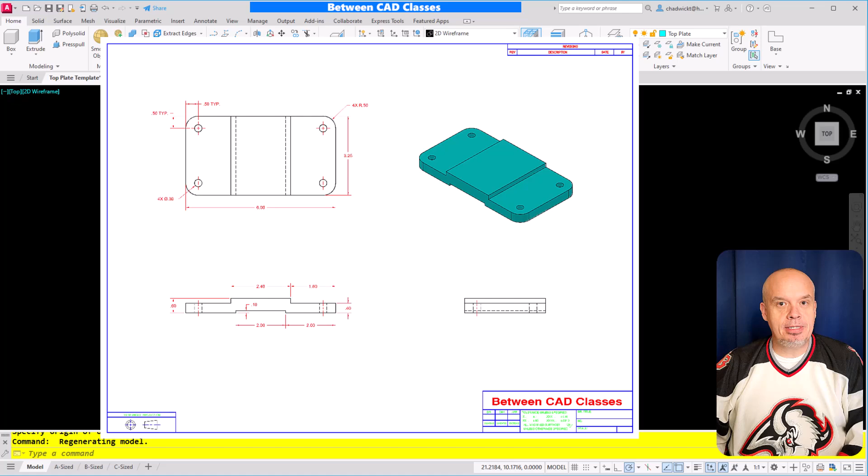The first part that we're going to create is going to be this top plate. I could approach this part a couple of different ways. I could sketch it from the top and extrude up and then add some features and cut, but I think the most efficient way is going to be to start from this front view and create this sketch and then extrude it back the depth of 3 1/4. Then, once I've done that, I'm going to add the rounds to each corner, the fillets, and then I'm going to add the 4 holes. So that's the path that I'm going to take for this particular part.

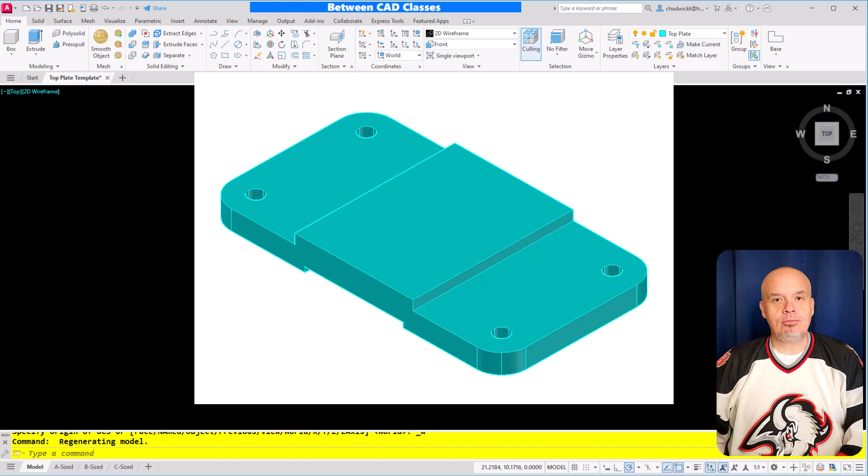Let's jump right into it. As you can see, I'm already in my top plate template, and as part of that, I've got my top plate layer current. You'll also notice that I've got my 3D modeling workspace set, so if you don't have that, you can click your workspace drop down and go to your 3D modeling.

As I mentioned a moment ago, I want to start by sketching the front shape. Right now my view cube tells me that I'm looking down from the top, so I actually want to change my view orientation to the front. There's a couple of different ways that you can do this. If you use the view cube, I'm going to go ahead and select the home button on my view cube to go to 3D. And I'm even going to turn on my grid so you can see the plane that I'm sketching on.

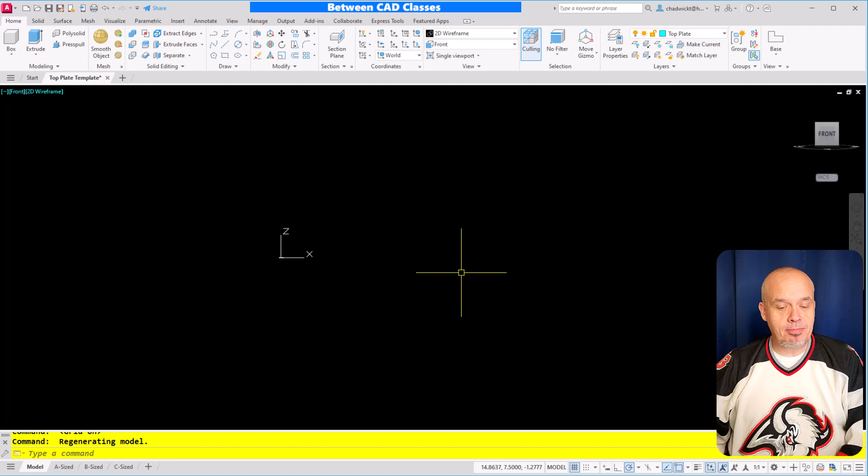If I select the front, you can see that I am not actually sketching parallel to my plane. In fact, if I try to sketch, I'm only going to be able to draw horizontal lines. That's because I changed my view, but I didn't change my user coordinate system. So I'm going to go back to home here. And then instead of using the view cube, I am going to use my view drop down right here, and I'm going to select front. Now it reorients my view, and I'm sketching on the XY plane.

Don't be alarmed by the fact that this changed to top. Basically, you're always sketching on the top, it's just we redefine where the top is. So as I mentioned, I'm going to start with that front view.

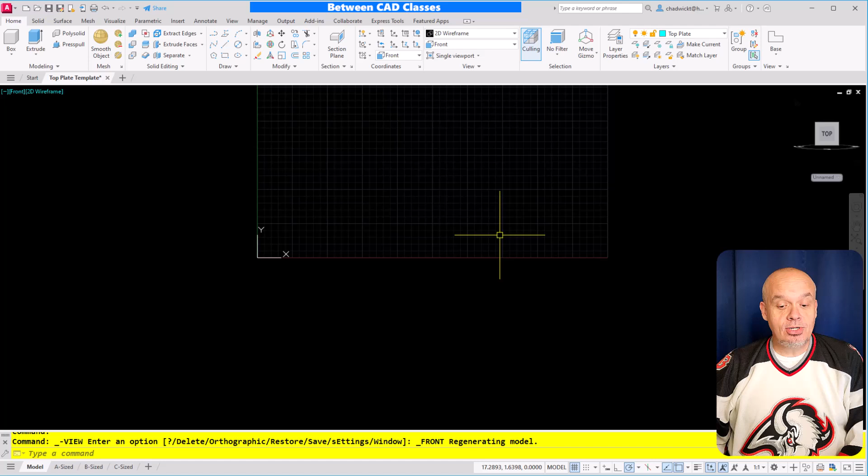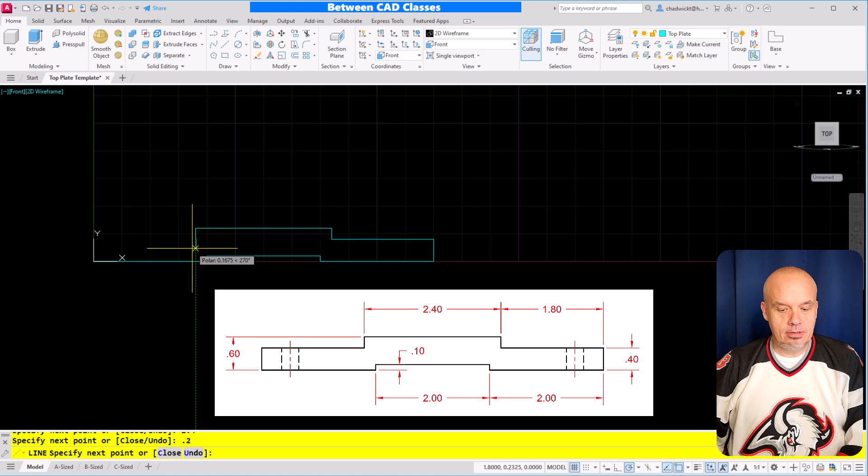I'm going to start with a line command, and then I am going to start at 0, 0 for my first point. Doing a little math, we can see that we're going to come straight to the right 2 inches to start. Then I'm going to go up 1/10 of an inch, so 0.1, back to the right 2, back down 0.1, back to the right 2, and then up from there 0.4, back to the left 1.8. Doing a little bit of math here, I'm going to go up 0.2, back to the left 2.4, back down 0.2 again, back to the left 1.8, and then you can either click on your original point, or you could type in 0, 0 and hit enter, or my personal favorite, I'm going to select close at my command line.

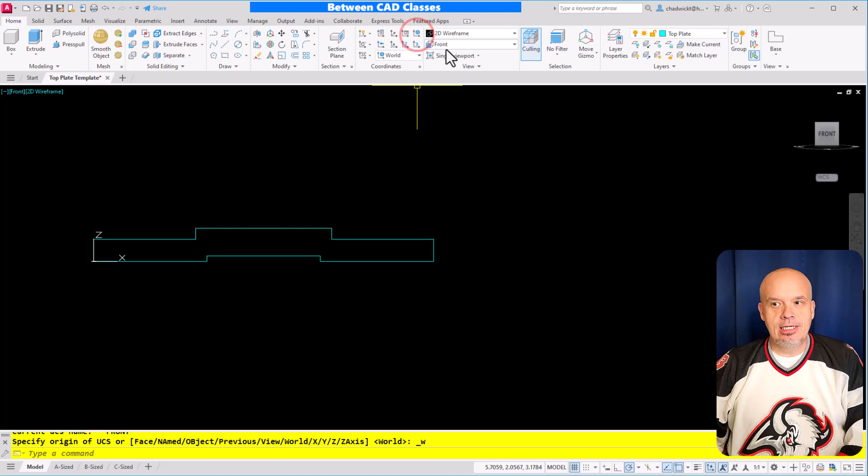Next, I'm going to return to my world coordinate system. I'm going to use this button right here that has the planet Earth on it. This sets me back to my original UCS. I'm going to click the home button, and now you can see that I'm back to having my horizontal XY plane here. Next, I want to extrude this, but right now I've done this as separate lines, so if I extrude it, it's going to create surfaces.

I'm going to join these together. Personally, I like to type J and enter, but you can also select the Modify drop down and select your join command right here. I'm just going to window around everything and press enter.

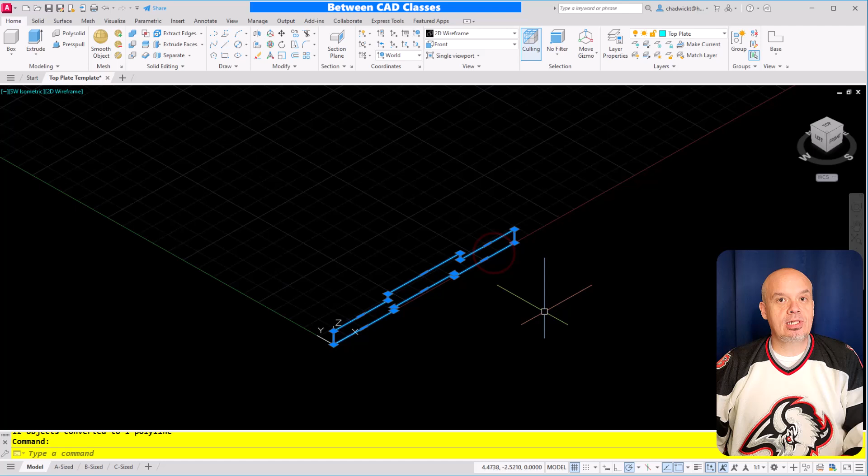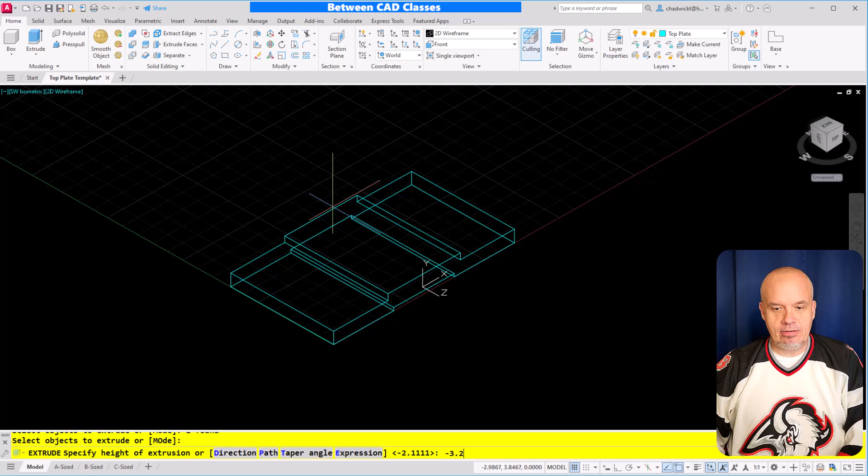Confirm that it's one selectable object now. Next, I'm going to extrude this. I'll select my extrude command and select my shape, then press enter. I can see that the Z positive direction is going out towards the front. I want it to go back, so I'm going to put in a negative value. So the depth is 3.25. I'm going to type in negative 3.25 and press enter. And now I've got my main shape here.

I'm going to use the text here to change this view to shaded with edges so that I can see the solid part. This is where you can confirm that you made a solid part. If you see grid lines all over the shape, then you know that you created surfaces instead.

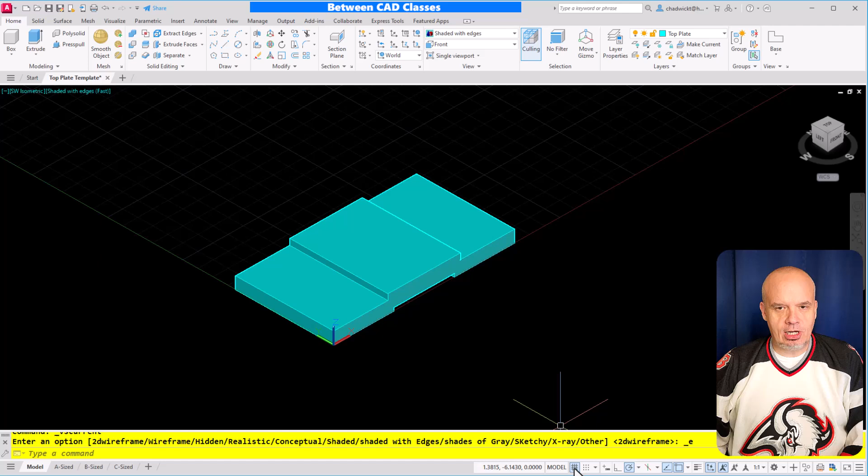Speaking of grid lines, I'm going to turn my grid lines off for now to clean up my screen a little bit. The next thing that I want to do is to fillet all 4 corners. I'm going to do them one at a time, that way, if I make a mistake, I don't have to start completely over on all of them.

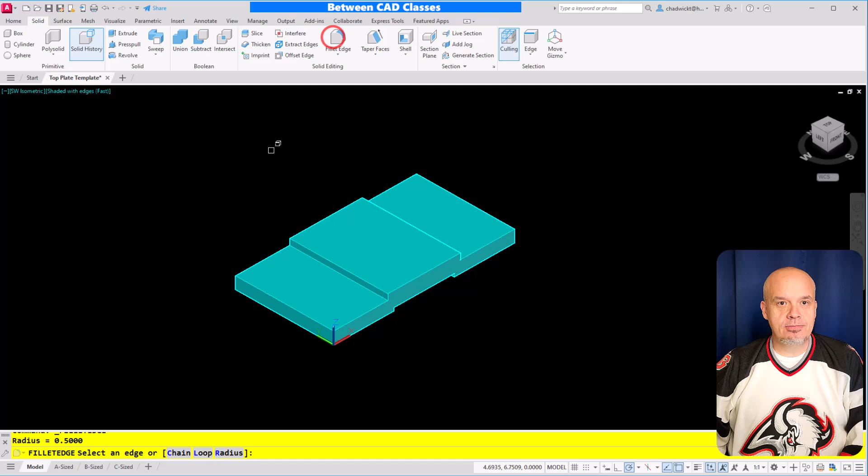For this, I'm not going to use the normal fillet command. I'm going to go to the Solid tab, and here I'm going to select Fillet Edge. As with the normal fillet command, I'm going to come down to my command line and select radius, then type in my value of 0.5 and press enter.

Then I am going to select the first edge that I want to round. I'll see a preview of it, and basically you have to hit enter twice: one time to preview it more in depth, and then one more time to accept it. So I'm going to tap the spacebar multiple times when I do this, to repeat the last command.

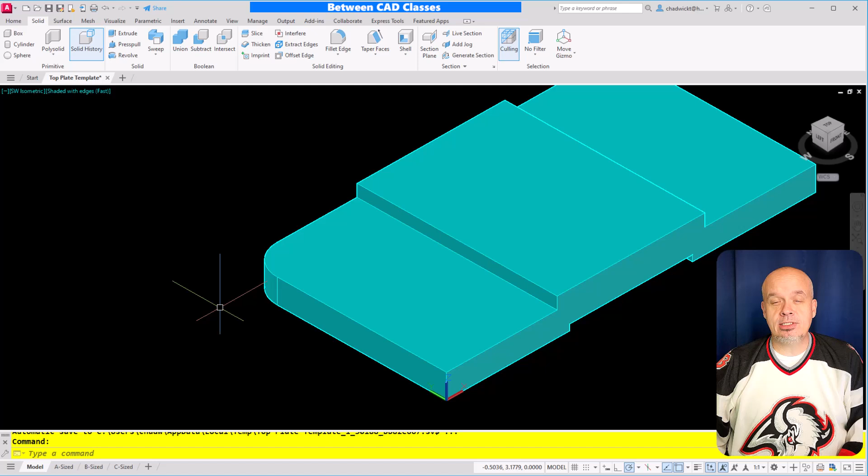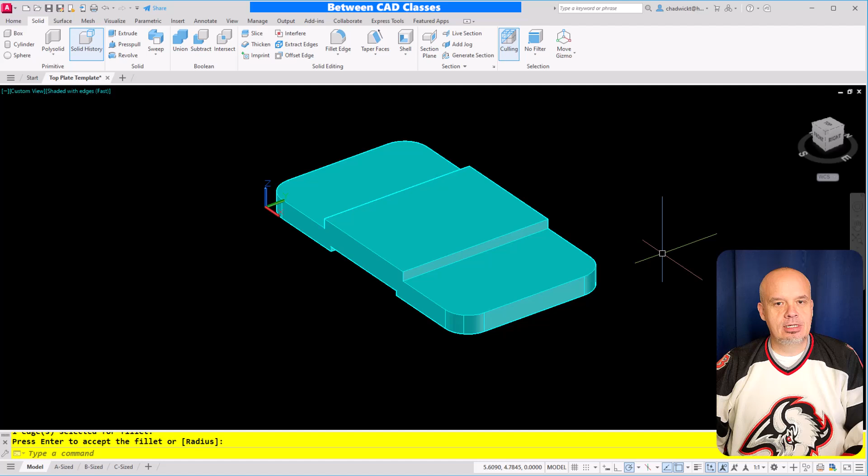I'm going to select the next edge, then tap it twice to accept it. Same thing: tap the spacebar to repeat the last command, pick my edge, press enter to preview it, and enter one more time to accept it. Then I'll revolve around here, and one more time, spacebar, select the edge, then spacebar twice. Now I've got my half inch radius fillets on each corner.

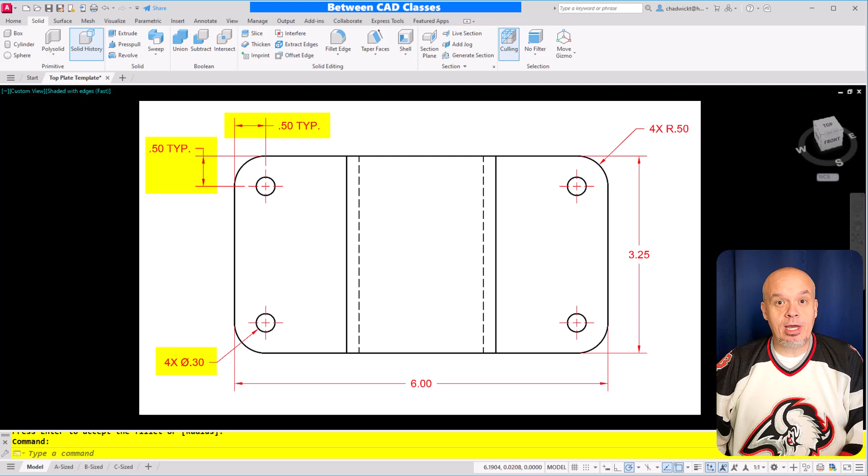Finally, I have 4 holes to place, and you can see in the detailed drawing that these holes are a diameter of 0.3. You can also see that they come in half an inch from each side. So since we've got half inch fillets on each corner, these holes are located at the center of those fillets. Rather than try to come in half an inch each way, I'm just going to snap to the center of each of these arcs.

To do this, I need to make sure that I have Dynamic User Coordinate System turned on. Down here in my status bar, you can see DUCS, or Dynamic User Coordinate System, is turned on. If you don't see that button, you can click the Options button on the bottom right of your status bar and turn the Dynamic UCS button on. Now this just turns the button on or off, not necessarily the feature, so I also want to confirm that the feature is turned on as well.

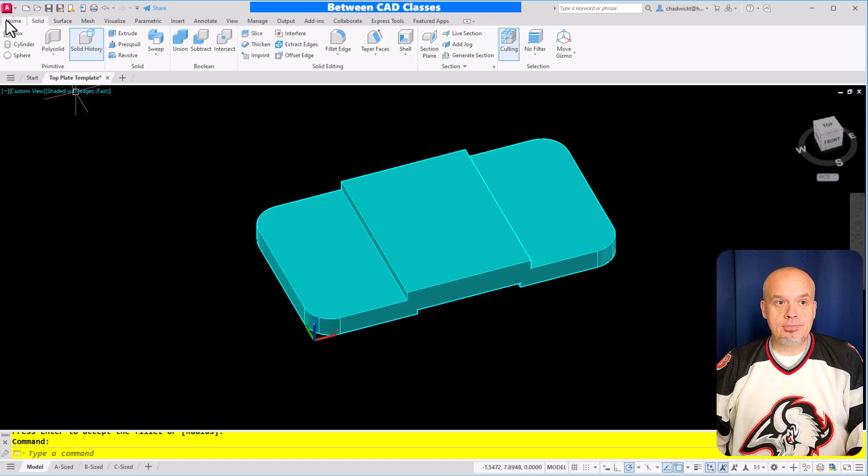Next, I'm going to sketch a center diameter circle. Back to the Home tab, I'm going to click the drop down next to my circle and choose center diameter. Now with Dynamic User Coordinate Systems, you can see that it's highlighting each individual surface. I'm just going to come over until I see it grab the center object snap, click on the center point there, and then put in my diameter of 0.3.

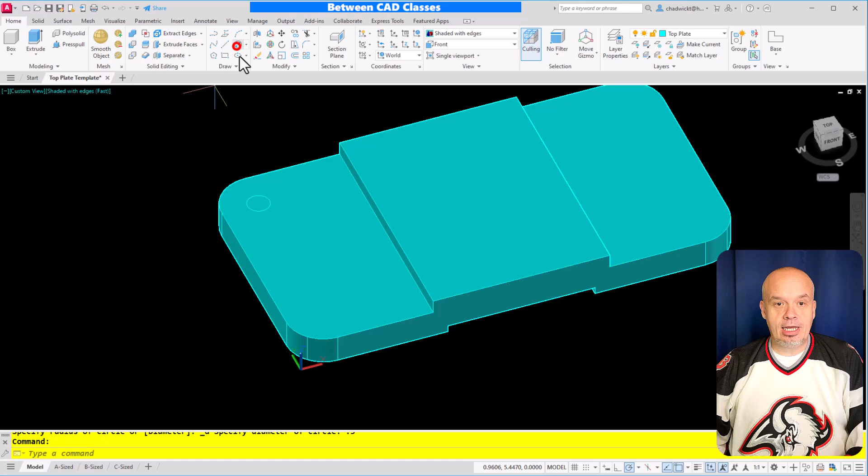I'll repeat that: center diameter. I'll come in and hover over the arc, then come back and click on the center point. Obviously, I have center object snaps turned on. Then I'll just press enter or the spacebar to create another circle of the same size. I'll do that a couple more times here: circle, center diameter, select the center, press the spacebar to keep the same size, and one more.

One thing I like to do in 3D a lot is object snap overrides. So I might instead shift right click and choose center, and then click on the arc. Once again, I can hit the spacebar to create the same size.

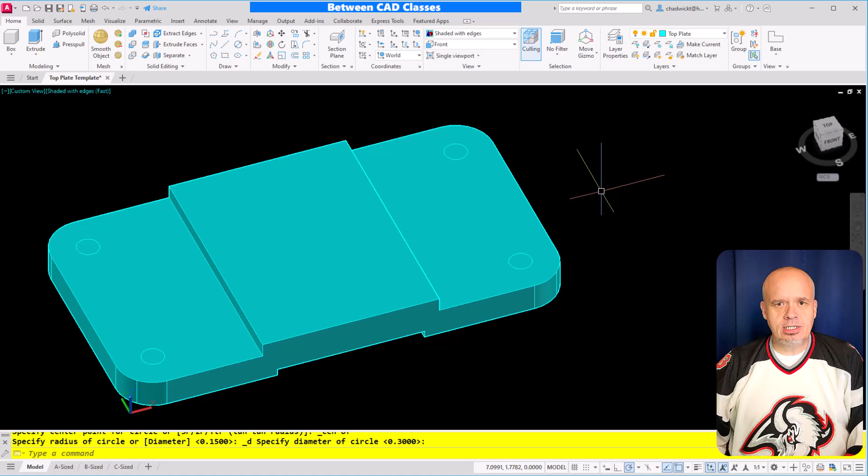Next, I want to extrude these so that I can cut them out. It doesn't matter how far I extrude them, as long as I extrude them through the part. Personally, I find that I can extrude a little better in wireframe, since sometimes I have a hard time selecting these sketched objects.

So I'm going to change my view back to 2D wireframe, choose my extrude command, select all 4 circles here, and press enter. Then I'll extrude them down below the rest of the part. I'll go back to shaded with edges, and then I'm ready to subtract.

In my solid editing panel, the second button here is going to be my subtract. When I select it, the command line asks me first to select what I want to subtract from. That's going to be my main part, so I'll select it and press enter.

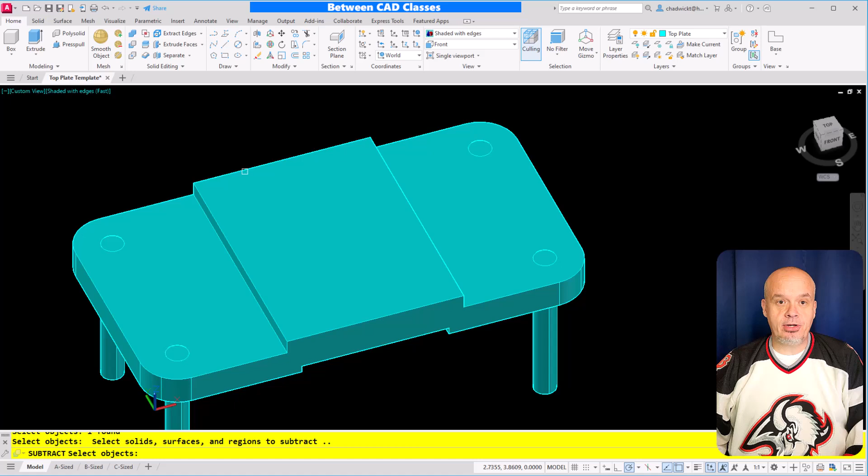Then it wants to know what objects I want to select, so I'm going to pick those 4 cylinders I just created. I'll rotate my screen so I can do a crossing and select all 4 at the same time, then press enter. Now you can see I have my completed part with the 4 holes.

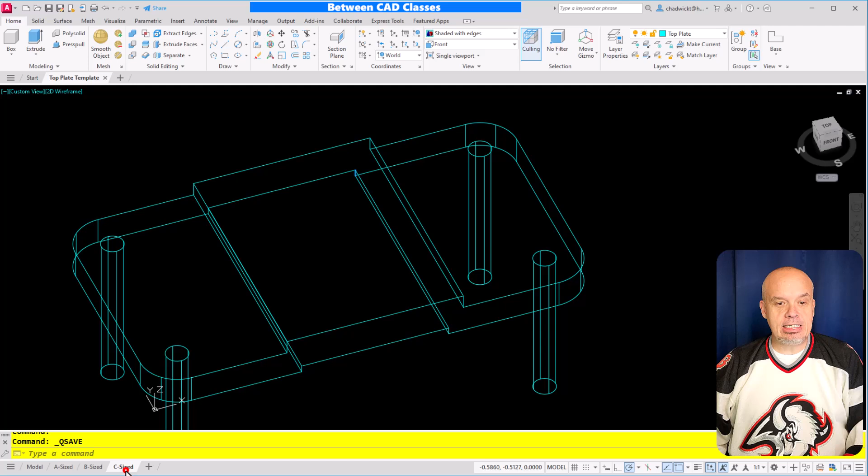I'm going to save my part, but I'm also going to create a detailed drawing. To do this, I'll go to the C size tab. Currently I have a viewport here, but I don't actually want to use it, so I'm going to delete that viewport.

Instead, here on the Layout tab, I have some tools to create some views. Now, what if you don't see these buttons? Let me show you what to do. I'm going to type menu load at my command line and press enter.

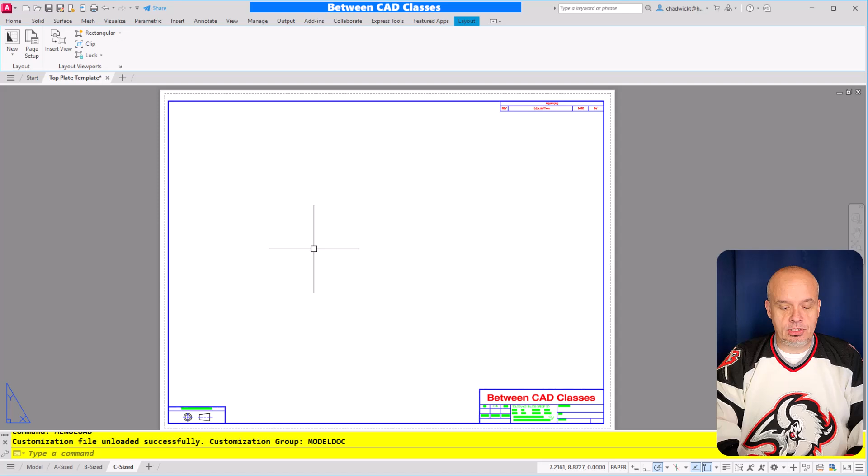What I'm looking for is this Model Doc, which is a model documentation menu. If I were to select unload and click close, you can see I no longer have those tools on my Layout tab. So if that's happening to you, just type menu load and enter.

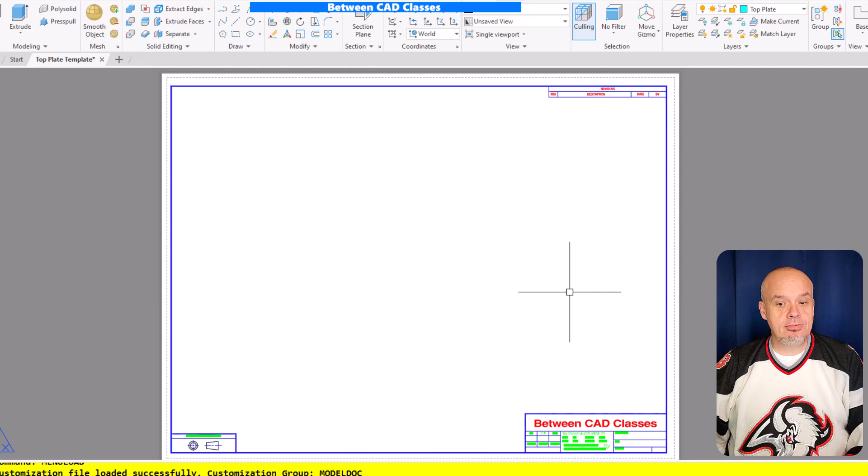Choose browse, scroll down and select the Model Doc CUI, then select load, and close. Now, the first time you try to use this, you're probably going to be prompted to install an extension. This is the Inventor Interoperability extension, and it's basically needed to create the views of solid parts. Even though we're not specifically dealing with Inventor, it uses the same workflow, so you'll have to install this for this to work.

Once you've done that, it's very easy to create our views. So here on the Layout tab, I'm going to go to Base View, then From Model Space. By default, it's going to show me my front view, but I can choose some other views as well if I want, and decide if I want hidden lines to show or if I want it to be shaded.

I'm going to choose hidden lines. I can choose a scale, and I'll go with 1:1 for now. I'll go ahead and click to place my first view here, and then click OK.

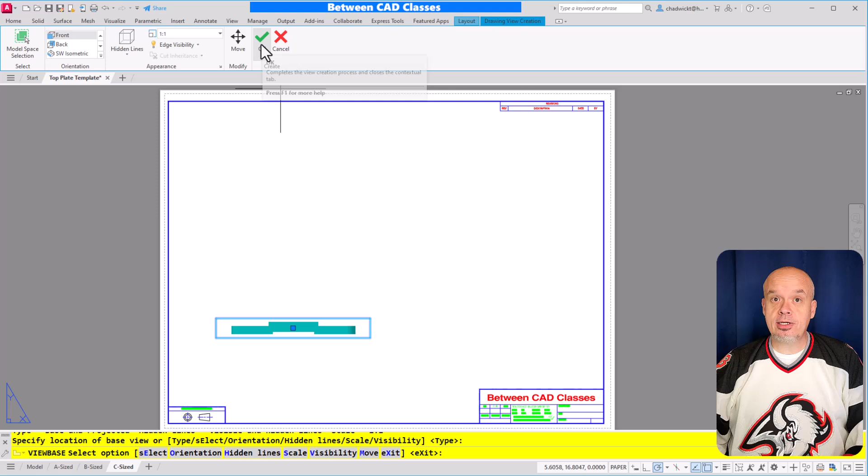Now I can create my projected views, so I'll create my top view, my right side view, and my isometric view. Then I'll right click and select Enter. And there you can see my 3 views.

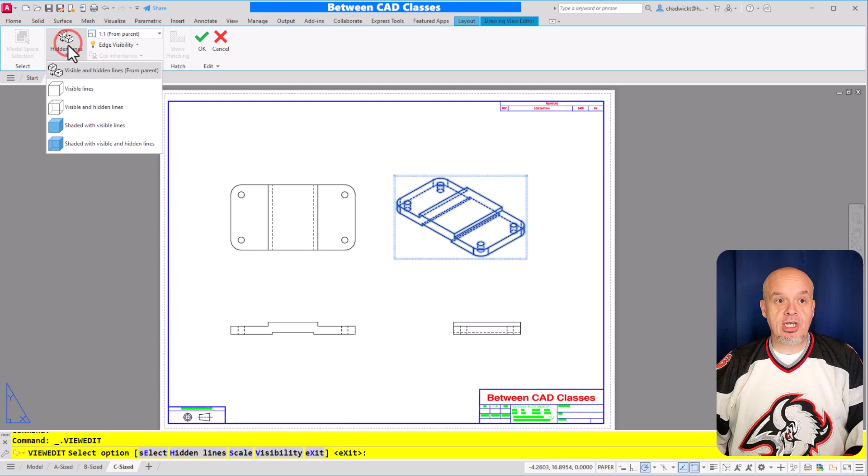I'm going to double click on my isometric view, then come up top to my ribbon and change this to shaded with visible lines, and click OK. From there, I can add in some center lines and annotations, but we'll go ahead and pause here since we have the solid part.

Once again, make sure you save the file and then be on the lookout for the other steps in this series so that you can create the full caster assembly. Thank you so much for watching, and we'll see you in the next video from Between CAD Classes.